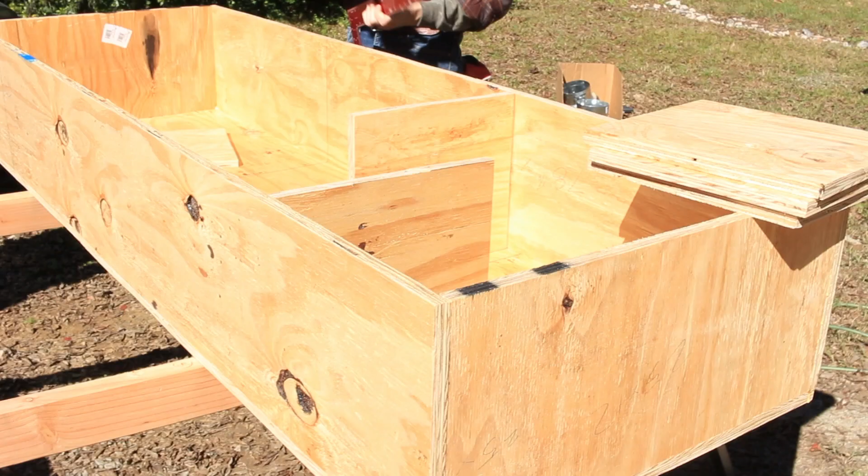It is complicated, but I think you'll find this video totally illuminating on how you could do this, and there are some things that you can customize and do on your own. Once you understand what I did, I think you'll be able to apply it to your own studio. So without further ado, we're going to jump in with an overview of it first, and then I'm going to

go over the plans. I had Rod Gervais draw up some plans for the baffle boxes because I wasn't quite sure exactly how to design them, and I'm going to share those with you. Rod Gervais, if you guys don't already know, is the author of the book that I always recommend, How to Build Your Home Studio Like the Pros. It's a great book. So anyways, trusted guy, he knew what he was talking about, and he really helped me out a lot with this design. So without further ado, let's jump into the video.

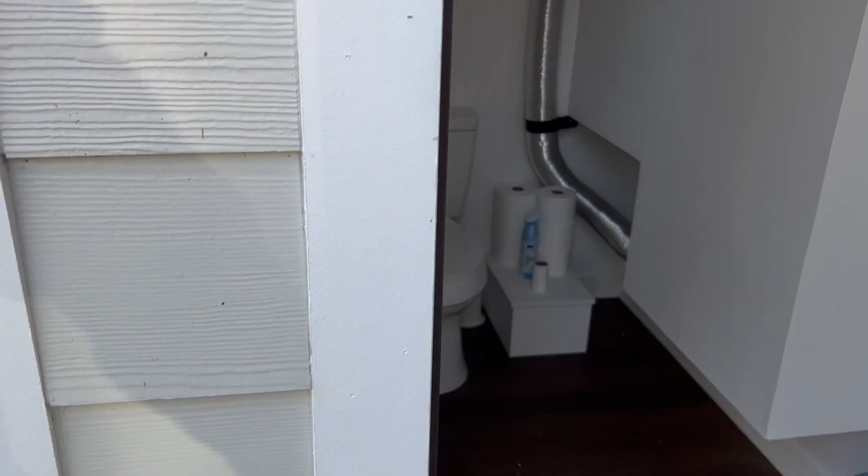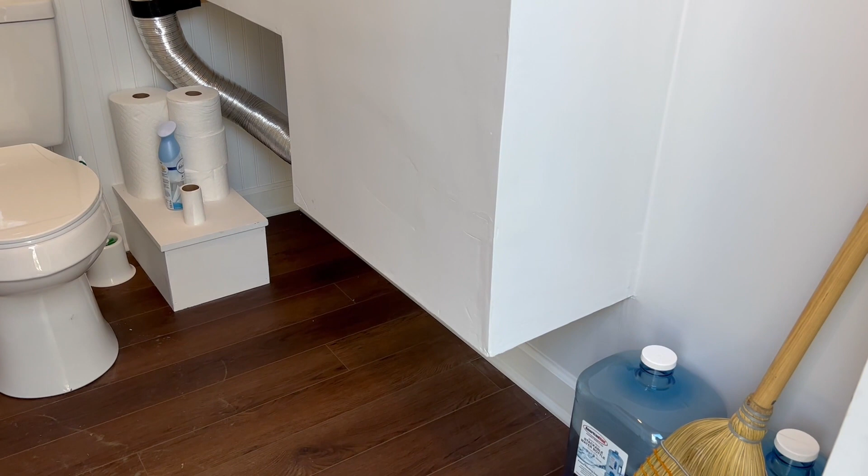All right, so I'm going to show you where the ventilation system is back here. I'm just going to open this door for our spare mechanical room. And what we have here, as you can see, is the ERV, and this looks like a crazy octopus. And then it comes down around. We've got our fresh air going in the top, and it's going down this massive, I'm going to go back a little bit so you can see better. This is our baffle box here. And then it comes in the bottom of the room on the other side.

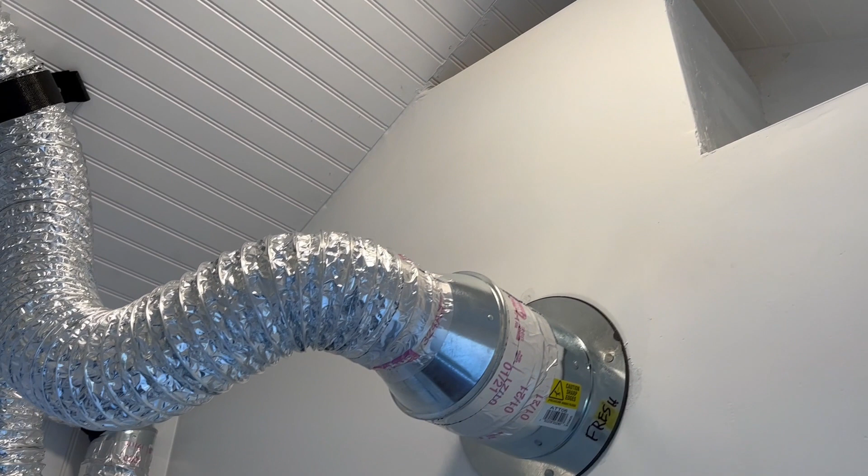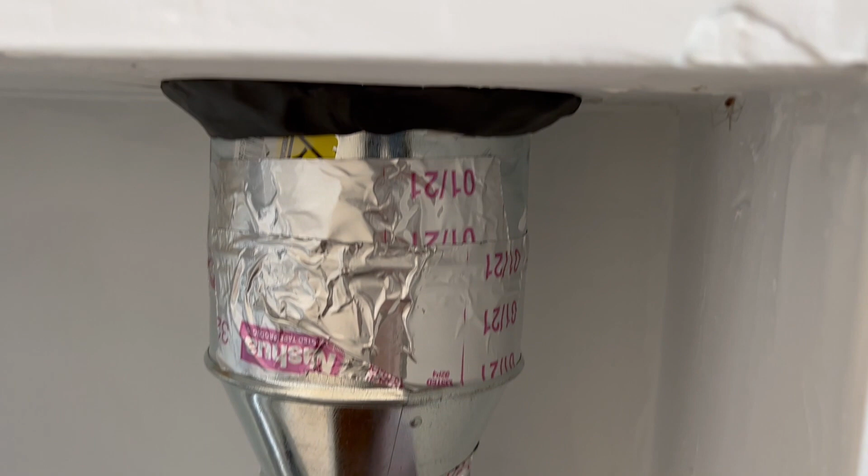The exit air comes in through the top, way up there, kind of angles over, comes down through the baffle box, and then out the bottom here. I can give you a little better look at how this bottom area is. We use some putty just to keep it really tight.

Oh, there's a little spider.

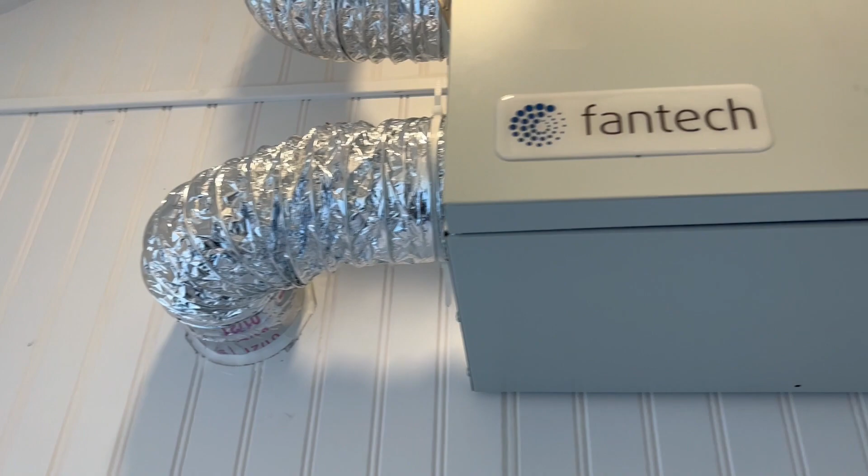And then it comes up all the way up and over. You could probably make this more clean in your own design, and it comes in the ERV and then it crisscrosses out through the exit vent. So our intake vent, I believe, is this one coming up across all the way around and coming in this way. It goes diagonally across, out, up, and then in the fresh air intake area.

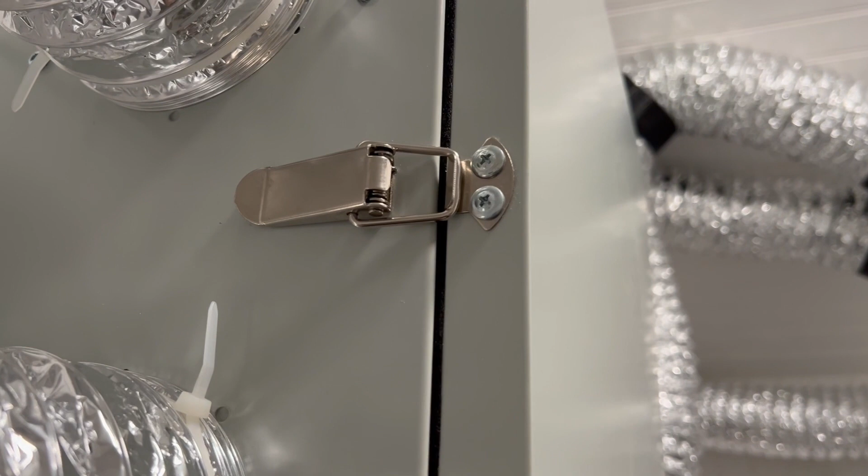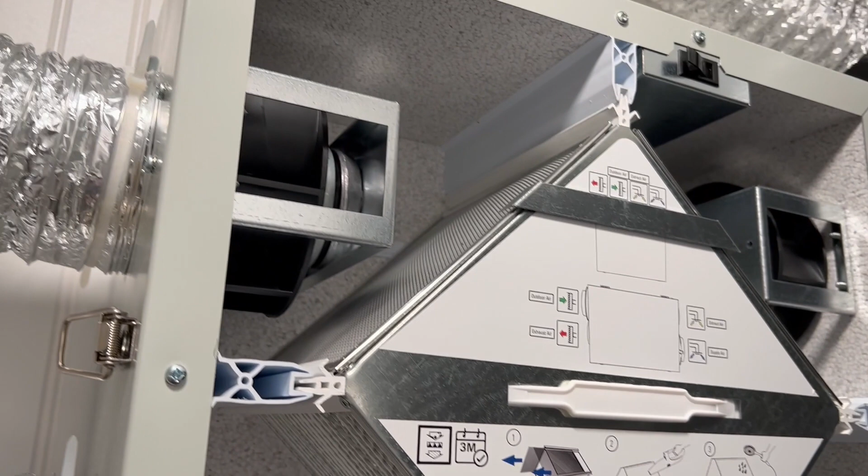So I want to show you guys what this thing looks like when you open it up. We're just going to open this up quickly, and you can see sort of the mechanical workings up here. As you can see, our fresh air is coming in the top. It's crossing down through the ERV and going out the bottom. The center filter here is really what does all the work. It heats and cools everything. Our exhaust air is coming in up there, coming through this bottom tube and going out through the outside. So pretty simple in nature.

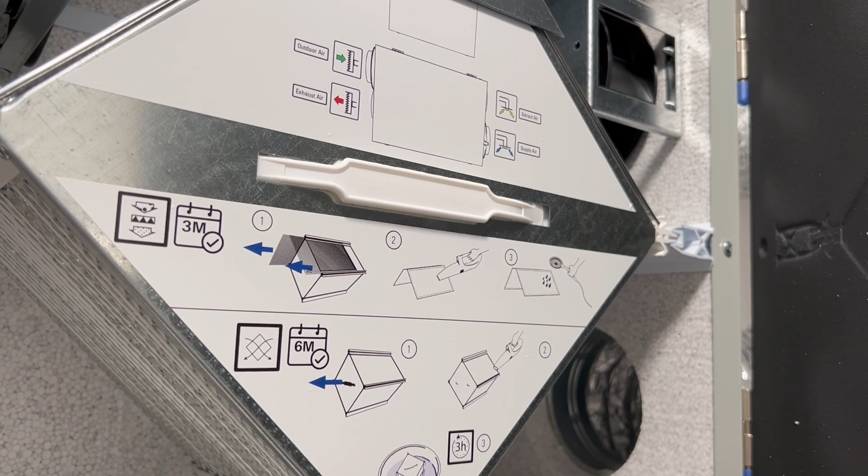You clean this thing every 6 months, every 3 months you clean, just with a vacuum or something like that. And it's really not that much work to deal with it. Pretty simple unit, and I highly recommend it. It's been working great. And I'm going to fire this up now so you can hear what it sounds like and how it works. So I'm going to close the door here.

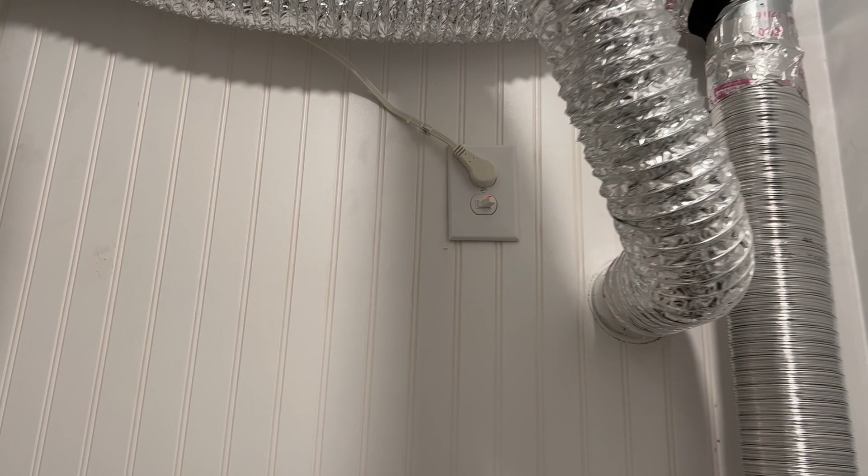Now I want to say that light switch right there is actually turning on and off the ERV. So right now the ERV is off, which is really nice because you technically don't need it running if you're not in there, since it's just supplying fresh air. It's not really heating or cooling anything. So I like to keep it off when I'm not using the system.

So just so you know, right now what you're hearing is not the ERV. That is actually my heater for this little room. Just a little space heater that's built into the wall. But I'm going to turn this thing on so you can hear the difference. I'm sitting on a squeaky chair, but we're just going to turn this guy on.

You can hear it very subtly kick on. And it's just like a slight whooshing sound. These things shake a little bit. This is a really funky room with all these in here, but it's really not that loud.

And just so you know, it's a Fantech. I highly recommend this one. And let's look at the exact model number. So there you go, Fantech SE704N.

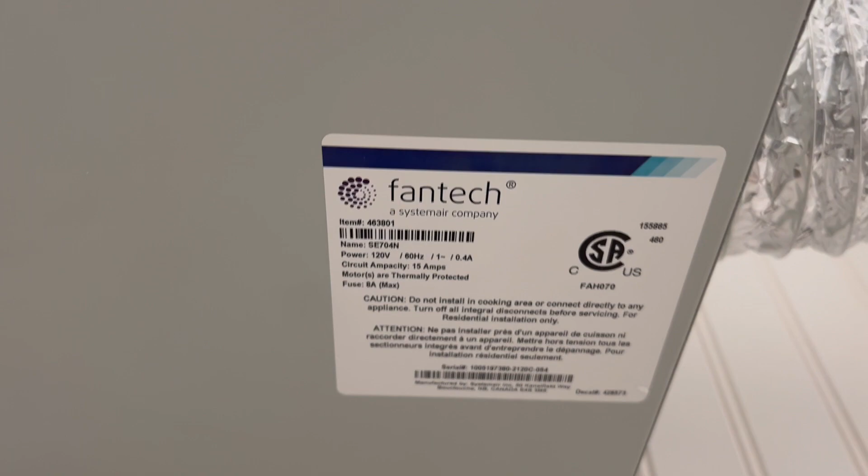There you go. So just so you can hear, now this is through my phone, but the microphone's pretty good. I turned off the other here just so you can hear, this is just the Fantech running. So I know a lot of people are worried about sound and stuff. I was worried about it too. It's very quiet. This is in a separate room next to your studio. It won't be a problem at all.

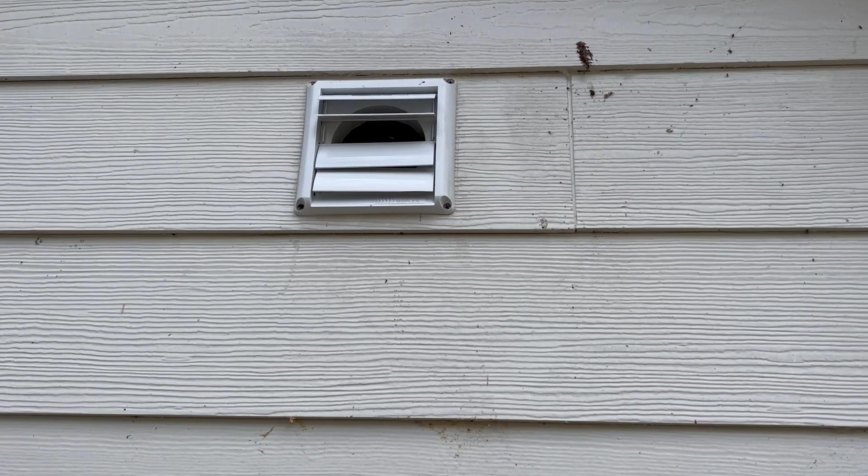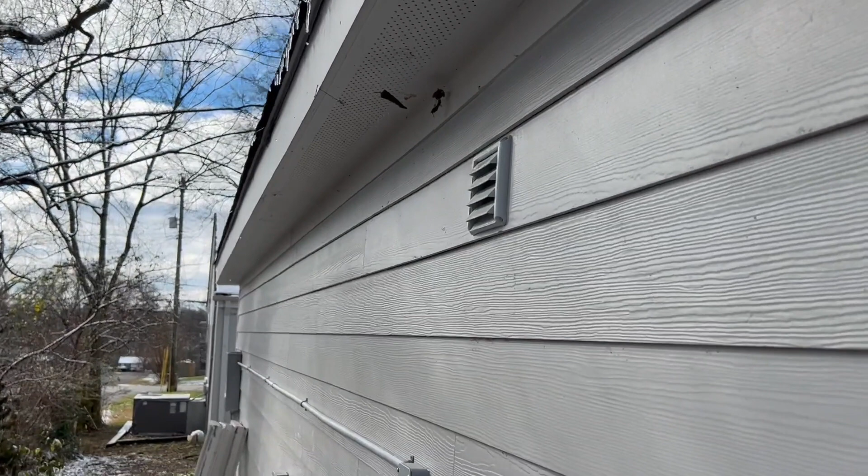All right, so I wanted to show you guys the exhaust hoods here. So you can see that one is currently blowing air from the studio out. You can feel it's a pretty solid amount of air flowing through there. And then on the other side of the building here, you want to keep these apart. We've got the air coming in. So two slightly different types of hoods, but those are what you want to put on the outside of your building. Those two like that.

So now we're in the studio. It's very quiet in here. This is the moment you guys are probably waiting for, hearing what it actually sounds like once the air is flowing through. So first I'm going to sit at this desk, which is where I do most of my mixing and producing and stuff. You can just listen. I can kind of hear it very, very faintly. I don't know if you can hear anything. I would say that my mini split is louder. If anything, I found that this actually has a slightly lower frequency hum.

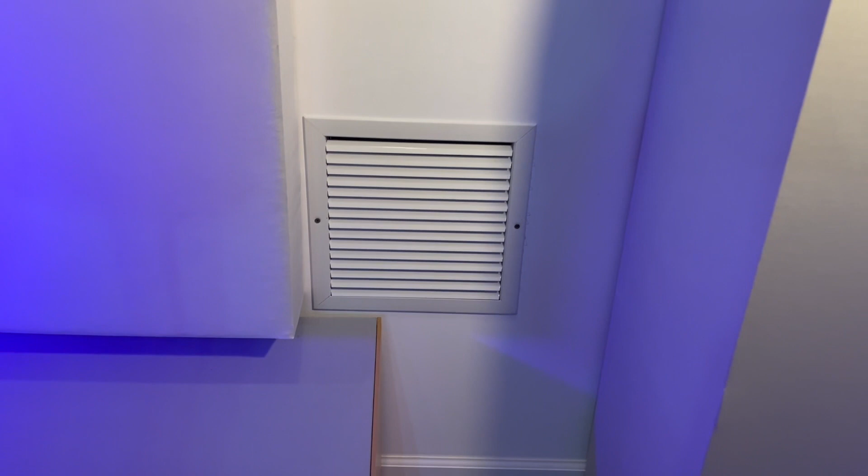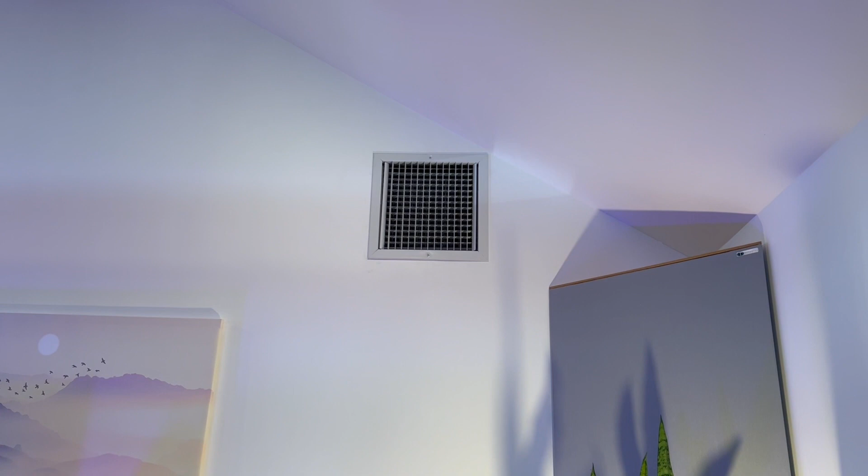But I'm gonna get really close so you can actually hear the airflow. And this is the air coming in. So right up to the vent. I'm gonna slowly move away. And right about here, I really can't hear it. And then you've got the vent that's taking out air up there. So your exit vent at the top.

And, you know, if I could do it again, I think I would not put these where I mix, it's just the way of the design. I might have put it over on this wall by the door over here and created an entryway and a mechanical closet on the entryway. Or on the very back wall near my mini split, I might have put them over here or something like that. So keep that in mind as you do your design.

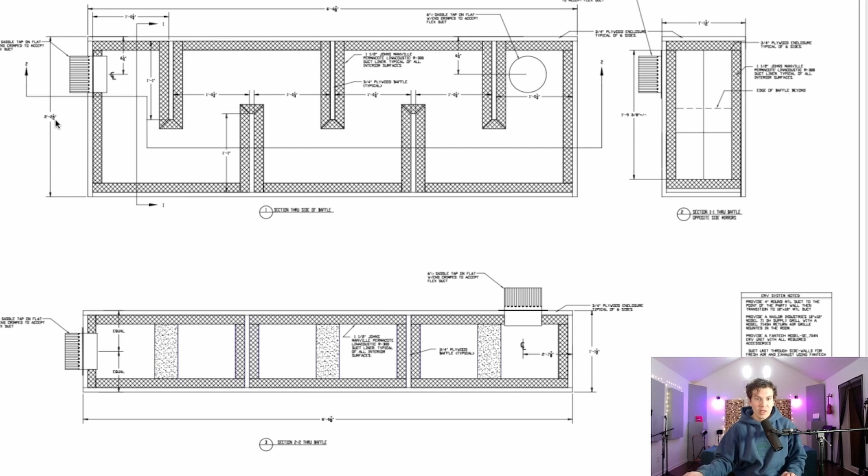So if you can see here, we have 6 feet, 6 7/8 inches long, and then 2 feet, 2.5 inches wide. The depth of this bad boy is 1 foot, 1.5 inches across. So the idea is fairly simple. You're creating these baffles. The air is coming in through a 6-inch saddle tap on flat with end crimp to accept flex duct. Nothing too crazy there. Just get something that can get 6 inches in there, attach it with screws.

We're using 3/4 inch plywood the whole way around, 3/4 inch plywood baffle. So that's what these guys are. That's what all this box is. And then this cross-hatching here is Johns Manville Permacote Linacoustic R-300 duct liner, typical of all interior surfaces. So that stuff was pretty hard to find. I actually had to call around a bit and special order it from a warehouse here in Nashville that services special acoustic treatment for HVAC stuff.

It's a little expensive too. I think I spent about $500 on all the insulation, but I actually got a little too much. So I think I got 5 panels, and they're like 8 foot by 4 foot panels. So maybe you get 4 of those and you'll be okay. So 1.5 inches is the width of that too. So that's what you're gonna put all the way around this whole surface here.

And actually I'm noticing in this design here that he has these cut at a 45-degree angle, which is a good way to do it. We didn't do that, but that'll make it so that you never have any insulation showing. I'll talk a little bit more about that later in the build section of this. So we have this 1 foot and a 1/4 inch air gap that is essentially going to be going the entire way, 1 foot and a 1/4 inch now, all the way to the plywood there.

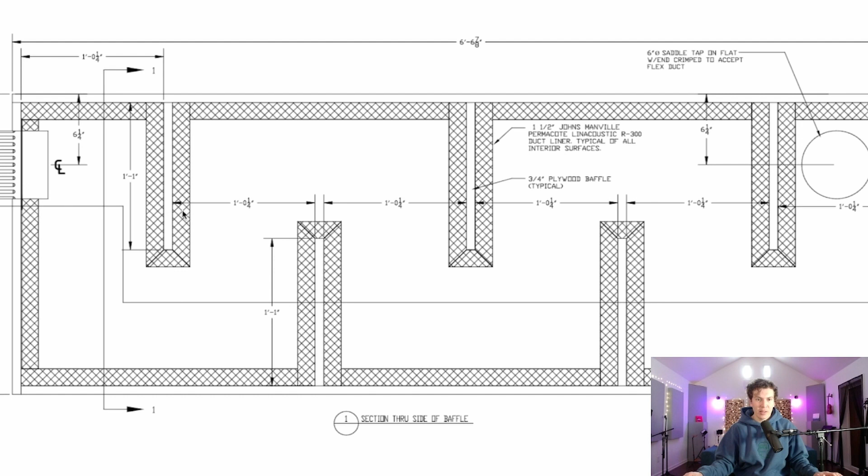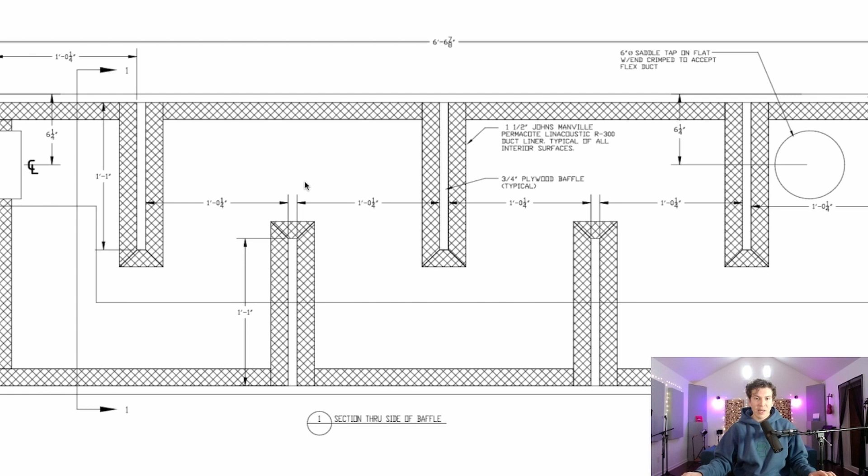So noticing these designs, this is how you're going to build your baffle box. And this will give you adequate air for a space. My studio is 270 square feet as a room. So anything around that range, this system could work well. If you have slightly larger space or multiple rooms or things like that, you might even want to reach out to Rod, or I will make a video in the future that kind of goes into more of the math and science behind sizing these vents and getting the right airflow and things like that.

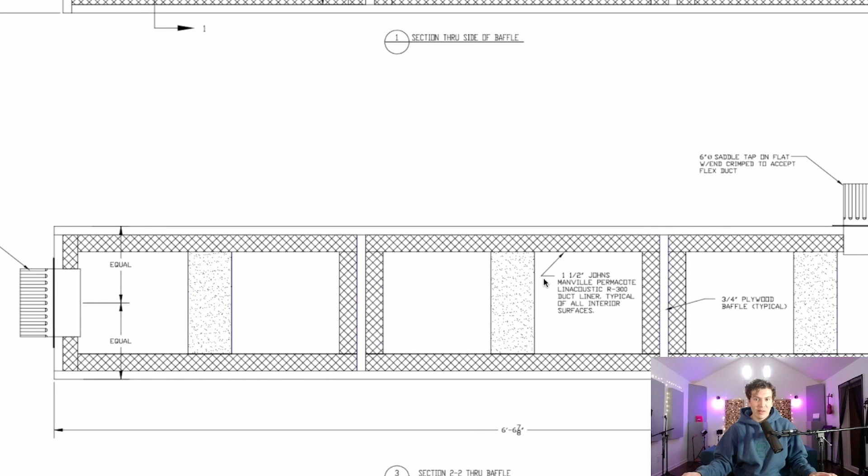That was one of the reasons I wanted to hire Rod, is I just wanted to be reassured that the airflow was going to be slow enough that I wouldn't hear it, and also that I was getting enough air to begin with to circulate through the room. So that was some more math and engineering than I really wanted to delve in on my own. So here's a side view of it. It's a little complicated. This gives you some of the same dimensions there.

Now I want to take a quick look over here. Here's the system notes here. So provide 4 inch round MTL duct to the point of the party wall. The party wall is the wall between your mechanical room and your actual studio. And then it will transition to that 12 by 12 duct going into the actual studio, which is what we did. And I'll explain a little bit more about what that looks like in a second.

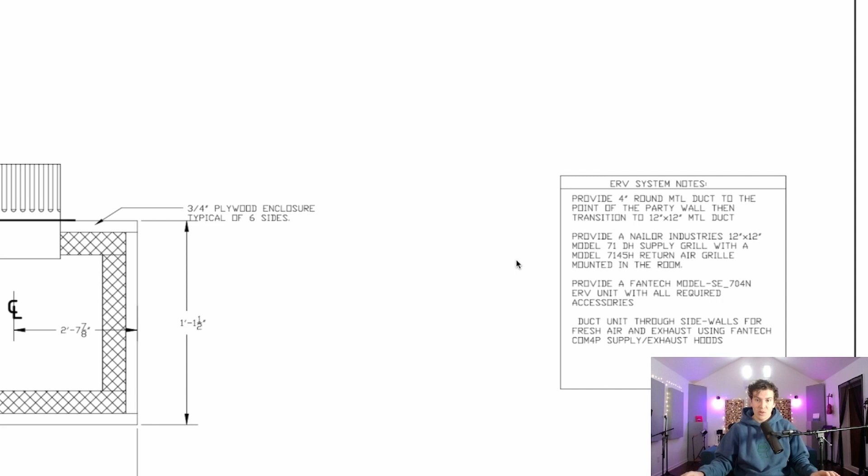You want to buy these Nailor Industries 12 by 12 model 71DH supply grill with a model 7145H return air grill mounted in the room. That's what those grills look like that I showed you earlier. And they're really easy to mount. Again, special order these, give yourself enough time to get them. Everything with this is so specialized that a lot of providers won't have them on hand. You got to call around for a supplier that sells the Nailor Industries and sells the Linacoustic Permacote product.

The Fantech Model SE704N is the ERV unit. Get it with all the required accessories. It just comes in a box. It's actually not too expensive. I think it was around, I want to say $500-$600, and shipped really quickly. So they were great to work with. And then duct unit through sidewalls for fresh air and exhaust using the Fantech COM 4P supply and exhaust hoods. So you can look those up on the Fantech website. And again, those came very quickly.

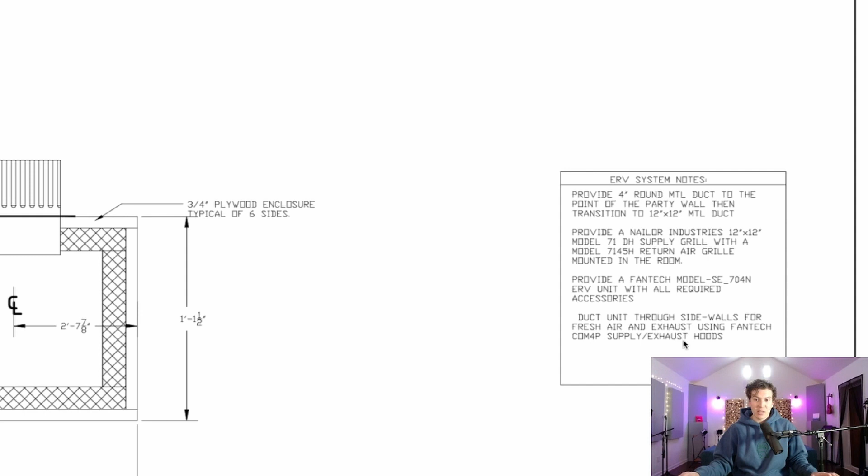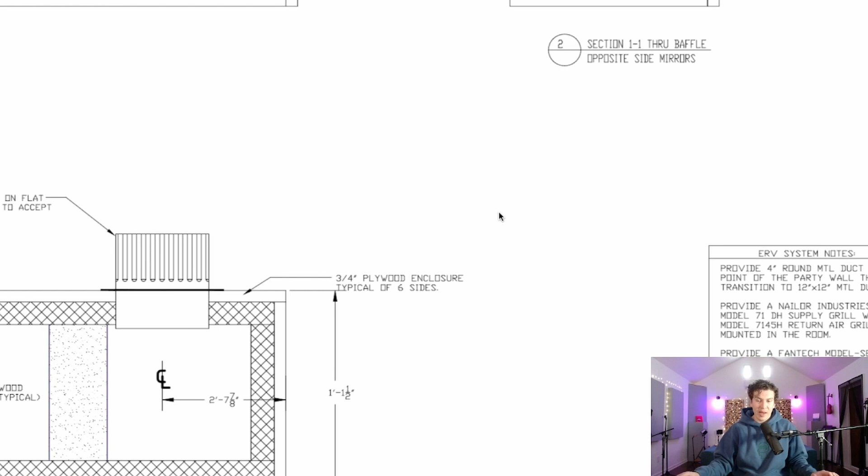Those are your supply and exhaust hoods, which I showed you previously in the overview on the outside of my building. And you want to make sure those are at least, I think it's 3 to 6 feet away from each other. It might even be 6 feet if you look at the diagram that they send you with the product. So this is all the technical stuff you'll need, and then you'll need to buy some more. You can get a lot of the plywood and the actual ductwork and these 6-inch saddles and things like that at Home Depot, Lowe's, or any big box store wherever you are in the world. So this is the more specialized stuff.

All right, so I just wanted to go over this plan with you so you could kind of see it more in depth. And I hope you enjoyed looking at this. Now let's take a look at the actual building of it and how it all came together in my studio.

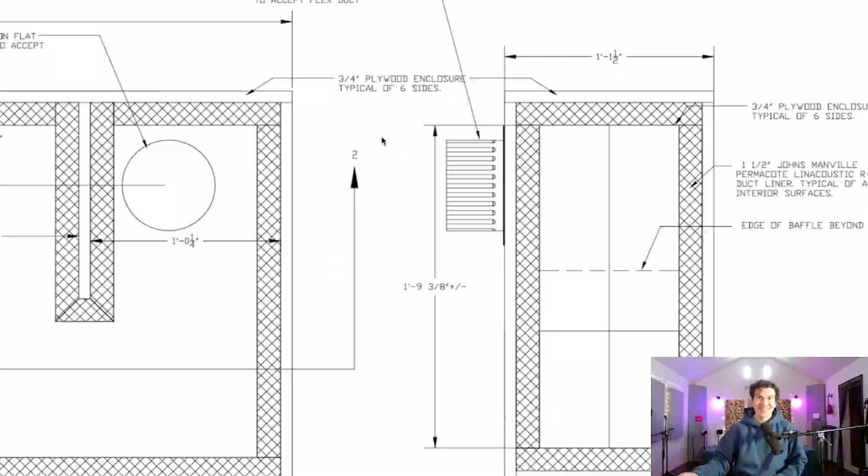All right. So now that we've talked about the overview of what I've done and gone over the design, I just want to show you a little bit more of the details of what we actually did with the build process, because it was kind of funky. Like anything you build, I feel like there's always this sort of art and improvisation that happens. At least that's the way it's been with us. And on this design of the boxes, that's kind of what happened.

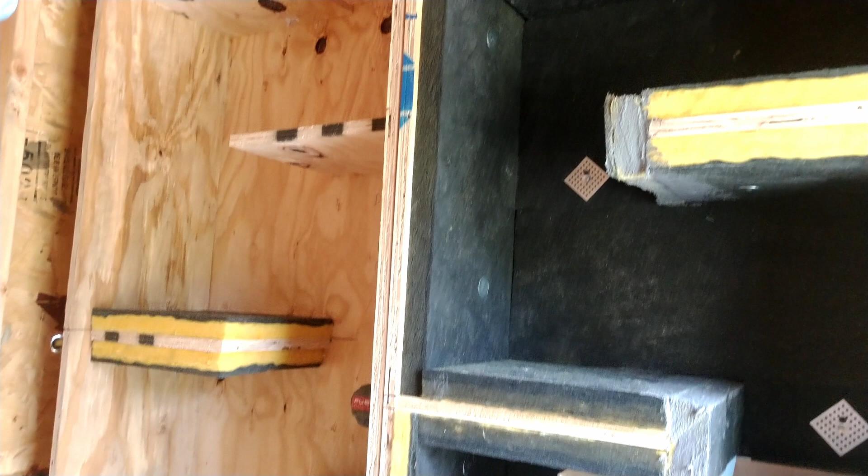So from the original design, we built it exactly like Rod had done, but to fit it into the space we had in that extra shed area there, we had to really kind of tweak his plans a little bit. So one of the things that we did is we actually extended the box that has the ventilation air that's leaving the studio. We kind of made it go up and over the other box just so it fit in the shed area that I had there.

So like I said, you can customize this however you want for your own studio. Just keeping the general idea of keeping those dimensions the same is really important so that you have that big space for air to flow through and slow down and also quiet it down with the insulation that's inside the box.

So the boxes themselves, you saw in the design how to build it. We basically just used that 3/4 inch plywood, followed those designs, making sure there's always a 1 foot and a 1/4 inch air gap between all of the pathways that are going through the baffles there. And it's somewhat self-explanatory.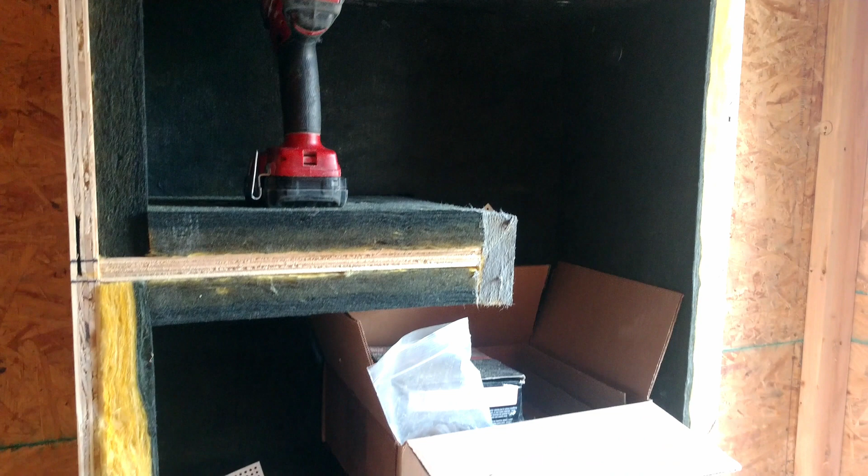Then what's kind of weird is when you're attaching the insulation, Rod had told me to use these things called stick pins, which are, I think, something that's used with insulation companies for attaching this material. Henry, my contractor, ended up kind of using them, I think, in the non-traditional way, which is totally fine. I'll have notes in the comments here on what those stick pins are and where you can get them. But to be honest, we didn't really use them correctly.

So I think honestly using a screw and a washer, Henry did this in some cases here too, it would hold that insulation in place as well. And if you had some sort of adhesive, like some sort of industrial glue, you could also glue that to the back of the insulation to hold it against the box. So like I said, you can improvise a little bit here. There's no right or wrong way necessarily, just to make sure that that insulation is held up against the box and won't droop or fall or anything like that.

The other thing to think about, and I think Henry figured this out the hard way, is that we found it was easier to put the insulation in where you left some room when you're putting the top of the box on, so that the top of the box just has one gigantic rectangular piece of insulation that you don't have to cut to fit in. That'll make more sense as you look at it here, but you can see there's a little gap so that the insulation, when they put the outside of the box on, it'll all just fit snug together. So those are little tips that I think might help you.

He also used this special type of paint. I believe it's for ventilation systems, but just to cover some of the excess insulation side so that you're not breathing in some of that nasty fiberglass through your ventilation system. So any parts where the black coating, which actually covers the fiberglass, wasn't showing, we painted over that to make sure that it doesn't get into the air system.

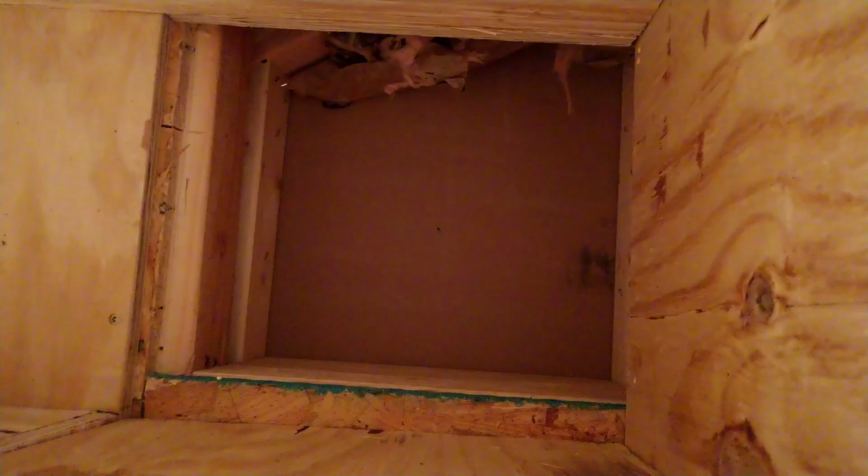That was one of my biggest worries, was trying to understand, well, how do you get through the wall? How do you make it so it doesn't touch? In the end, it's one of those things where you kind of break the rules. The baffle box opens up at the wall to a 1 foot by 1 foot opening, which I know some of you are dropping your jaw like, oh my God, that's massive.

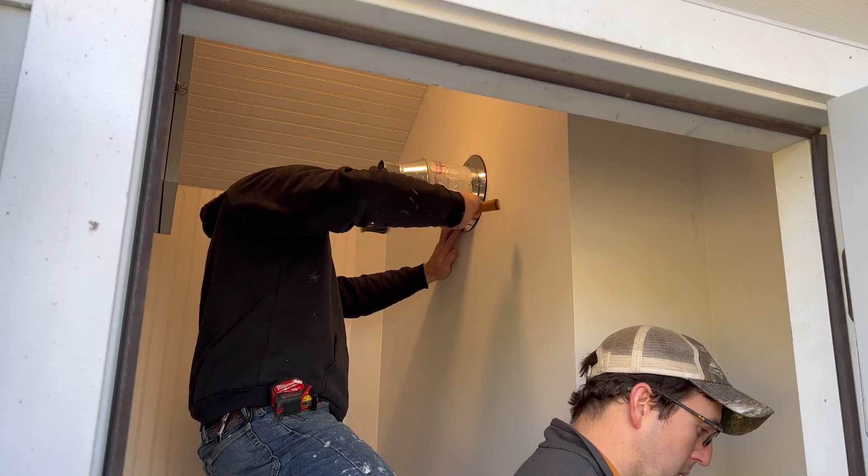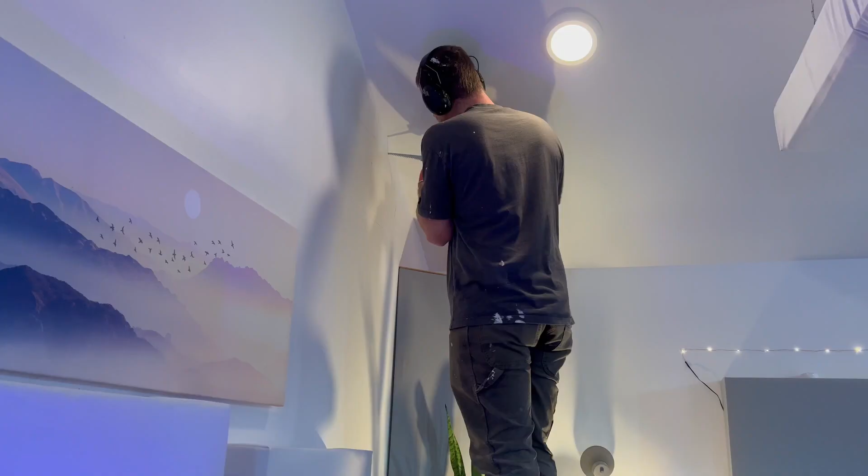But the truth is that the soundproofing in this room actually improved because we ended up adding a lot of extra drywall, double layers of drywall with Green Glue on that outside wall that wasn't there before. So my soundproofing, I believe, actually improved with putting two 1 foot by 1 foot holes in my wall. So I just want to dispel any worries that you have. If you do this the way I did, you'll be just fine.

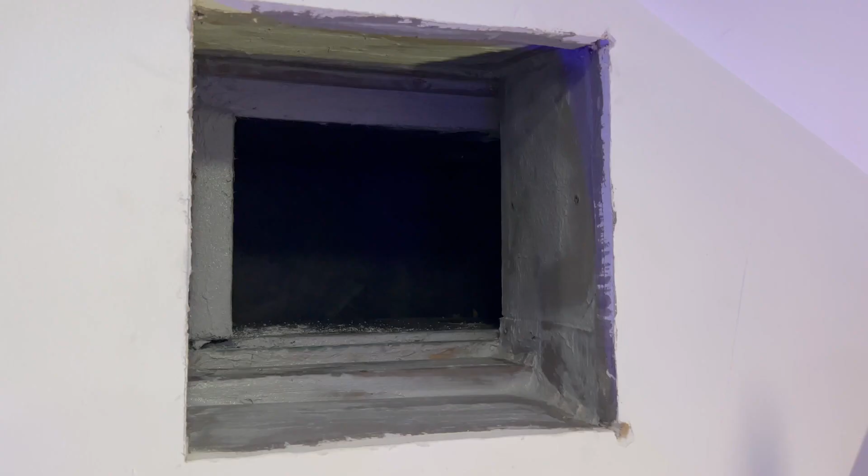So when you're punching through your wall here, you can see some video of Henry actually cutting through my wall and pulling out that massive 2 layers of drywall with Green Glue. And that was a scary moment when we put massive holes in our wall, but in the end, it worked out great. So you want to actually frame just with some pieces of wood through that wall, so you're going to create no gaps.

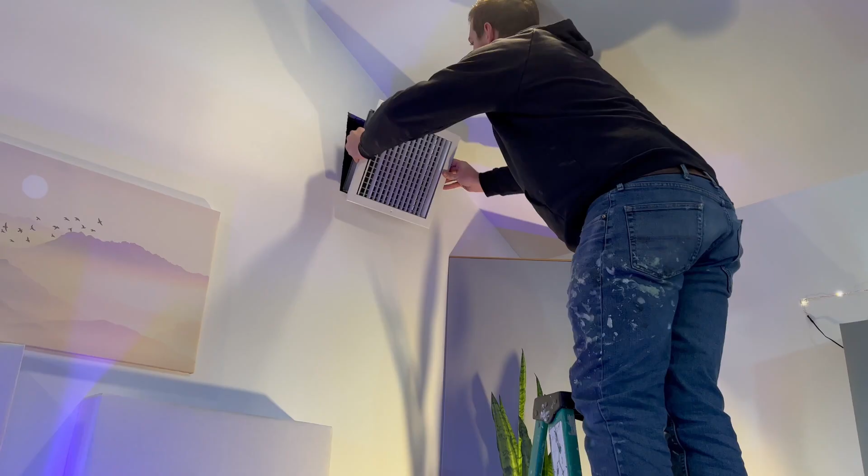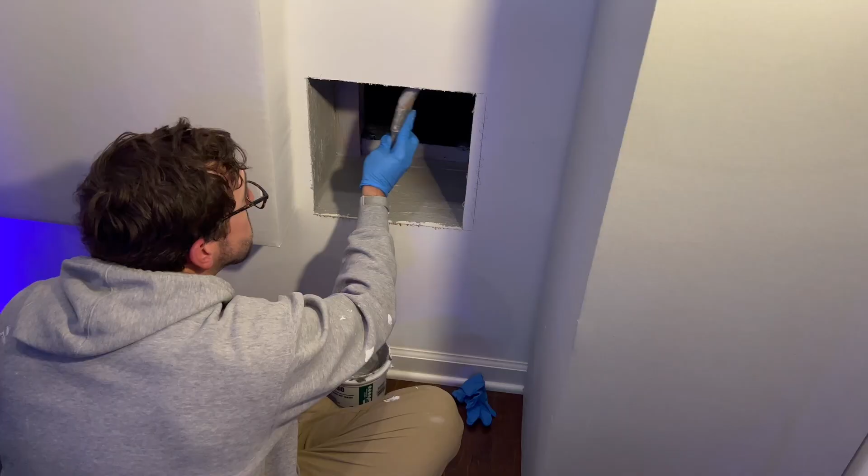Obviously, you don't want the air flowing into the gaps between your 2 walls if you did a double wall system. So you're going to create a 1 by 1 foot entryway for the air to come into your room, and then you're using the special grates that we talked about earlier, the Nailor Industries grates, that you can just screw right into the wall, and those will help also disperse the air evenly and quiet the air down. I think we also used some of that paint around the area where it enters through the wall, just so it's smooth and totally sealed up. So that's the general gist of how this all works.

In the end, I was surprised it's not quite as complicated as I thought it was going to be. I mean, it makes sense in theory, and then you do it and you're like, oh yeah, this is great, this works. So I hope that this video has helped clear up some of the fears you may have around building your own ventilation system in your studio. I can't recommend enough that you do this.

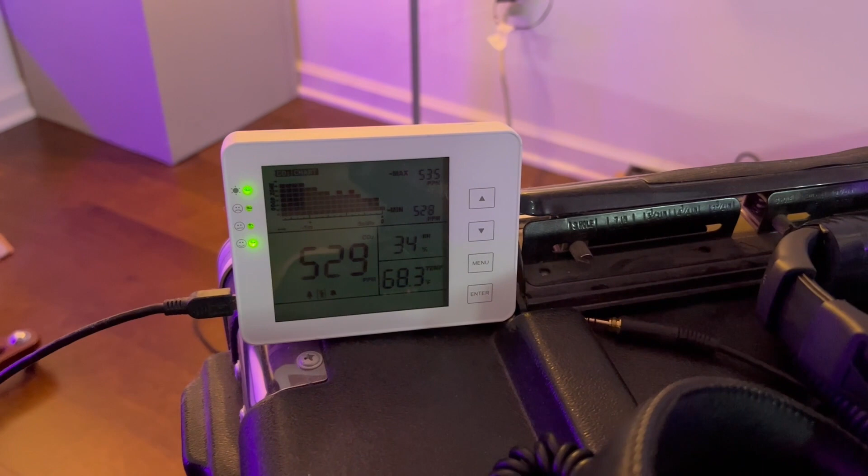I will say, if you look right here, I have had a CO2 monitor in my studio the entire time. And now my studio stays in that 400 to 500 parts per million range, which is close to atmospheric levels outside. And back when I didn't have a ventilation system, it would shoot up to anywhere from 1,500 all the way up to 2,500, 3,000 parts per million when we had like 2 or 3 people in here. So just so you know, that can cause headaches, it can cause fatigue, maybe even some slight dizziness.

I didn't notice it too much, but I will say that it feels better in here. I think I might have more energy, and just in general, it's nice knowing that I have fresh air circulating through my studio, especially, you know, with viruses and things like that happening as well in the world. So definitely do it. Can't recommend it enough.